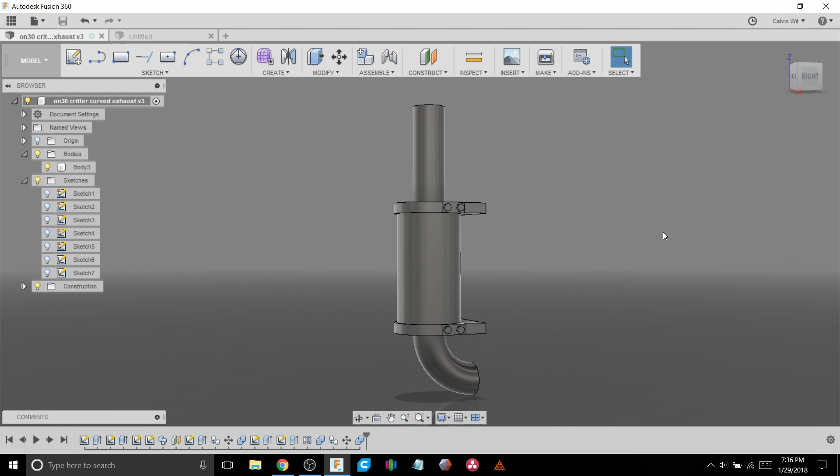So what we're going to first start off doing is designing this ON30 scale, but feel free to modify the dimensions to your needs, a little curved exhaust unit that can be used on a Bachmann Davenport. You'll also notice that I've done some detailing here with the strap and the hex nuts. You don't have to go that far if you don't want to, but I decided we might as well for those who want to. So let's just focus on designing up just the basic curved shape of the little exhaust pipe right here, the muffler body, and then the exhaust stack.

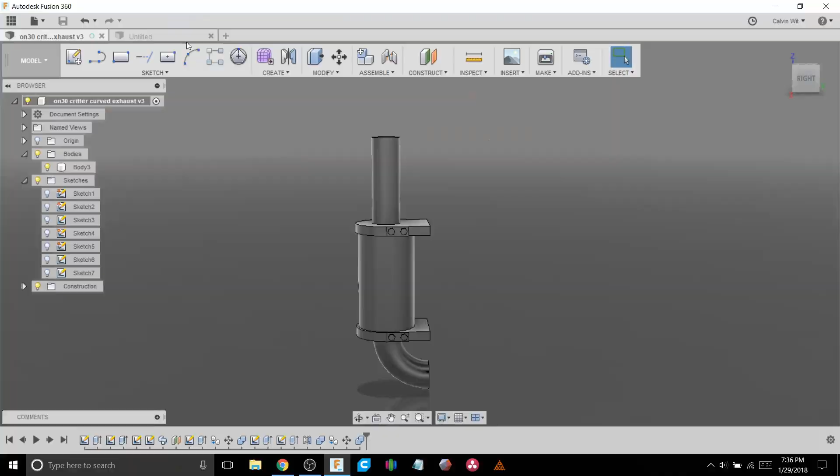So in a new window in Fusion 360, what we can do is we can start drawing the parts up. So right now you'll see there's nothing on the screen.

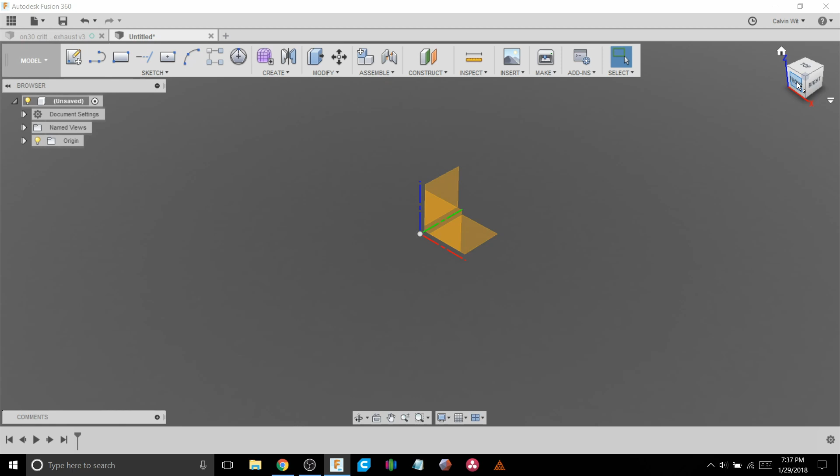I'm going to come over to the left here and click on the light bulb where it says origin, and you'll notice that this pops up. This is also oriented with this, which is what's called the view cube. So for this, we're going to want to click on the side of the view cube that says front.

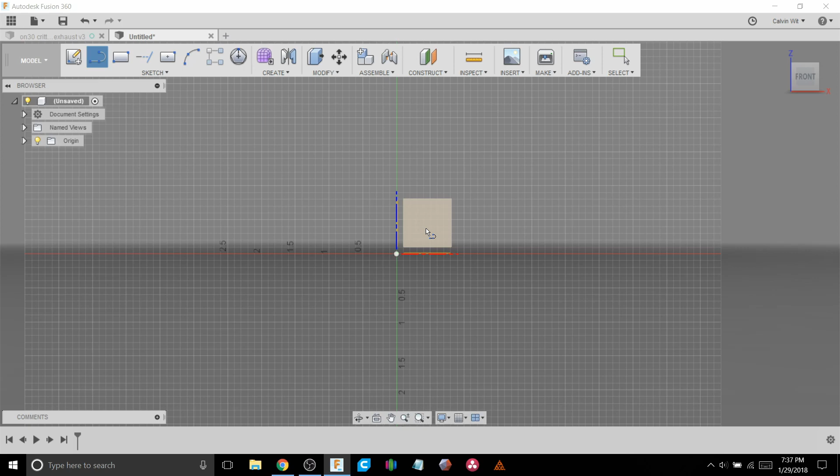We're going to want to select line. You can either go to the sketch tab here and click line, or you'll notice there's a hotkey L. Either works just fine. Click on that, and then we're going to want to select the plane that is facing us, the blue vertical, red horizontal, which will then give us the front plane, and we can get started. So we're going to select that.

You'll notice that we can really start anywhere, but for this we're going to need to start on the origin. So when you drag your cursor over it, you'll notice a green box and it will lock there. That's what you want. So just click once with the left mouse button and pull it over.

In this case, I'm going to go 0.125 inches because we're going to be drawing half the diameter of the exhaust unit, and I figured 1/4 of an inch works out to a nice size. So for all the dimensions on this, you're going to want to do it half of the actual size. For the radius, the height stays the same. So then once you've typed in 0.125, click again, and you now have your horizontal line.

Now you'll notice you're still attached in with a line. That's what we want. So now we're going to rotate it up so we get that little green box. And on the right, it should say 90 degrees as well. If it doesn't, and it's out here and you can't get that, just press the tab key once and you'll notice the degree side light up, and you can push in 0 and it'll take you to 0 degrees, or you can do 90 and it'll take you there.

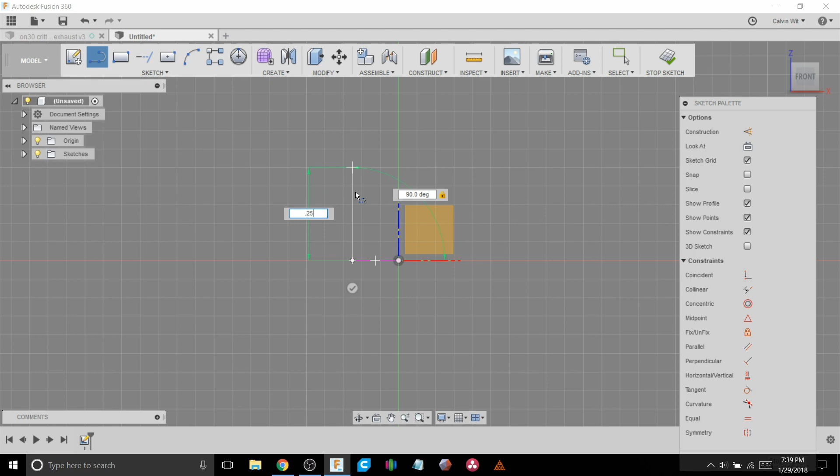In this case, we're going to want to go negative, going to want to go 270, there we go, as it's doing the 90s relative to where it was. So just remember to break up a circle into fourths, or you can just rotate around till you get there. So for the height, I'm going to go 0.375. If you don't like anything, you can just double click on the dimension and you're good. To get out of the line command, just tap the escape key and it will take you out.

Using the L again, I'm going to activate the line. I'm going to hover over the point and turn green, and then move in 0.125 inches, making sure that we're at 0 degrees, so we're horizontal. You'll notice that takes us back to the middle, which in this case we don't want, so we're going to want to retype that as 0.0625, and we're going to go halfway in, hit enter, press L again, and come up.

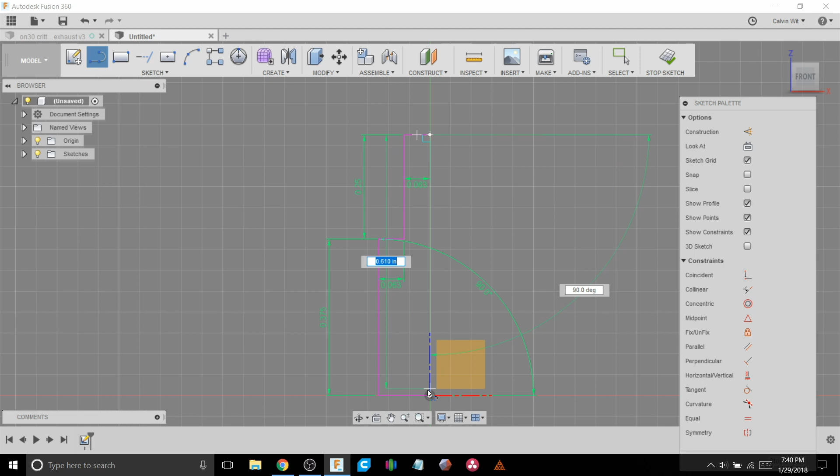In this case, I'm going to go 0.25. Like I've said, the dimensions, you do what you like best. There's no real right or wrong to this, but when you're first starting, I say start with what I'm doing. So now I'm going to click on the end of the 0.25 line, and I'm going to go in 0.0625 inches, hit enter, and then I'm just going to press L, and I'm going to click on the top of that line, drag it down to the origin, and now you'll see that the part has turned pink and is highlighted.

We'll press escape to get out of that, and in effect, we've pretty much created the basic shape of our muffler.

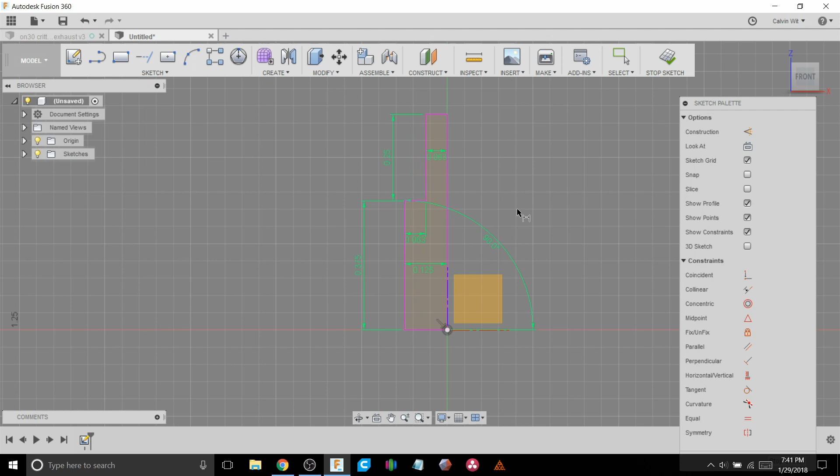One thing we need to do is press the D key for dimension. You'll notice this little line comes up. We're going to select this vertical line and this vertical line, then hit enter.

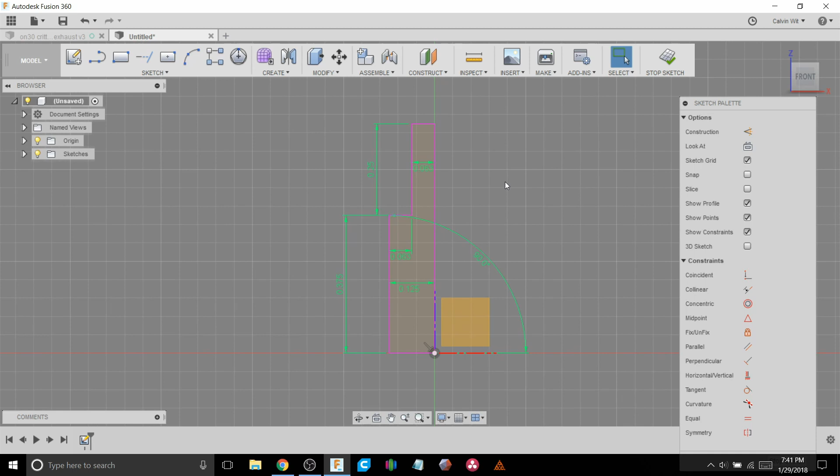That way, in case we need to adjust anything, we can do so. I'm liking how that's looking, so I'll come up to the right hand corner and click Stop Sketch. Don't worry, if you need to go back and adjust anything, just come down to the timeline, right click on the drawing and press Edit Sketch, scroll in with your middle mouse wheel, and you're good to go. So I'm just going to stop the sketch and zoom in so we can see what we're doing.

Then I'm going to go to the Create tab, and we're going to do what's called a revolve. As you can see from the drawing, this allows you to take a profile and spin it around an axis.

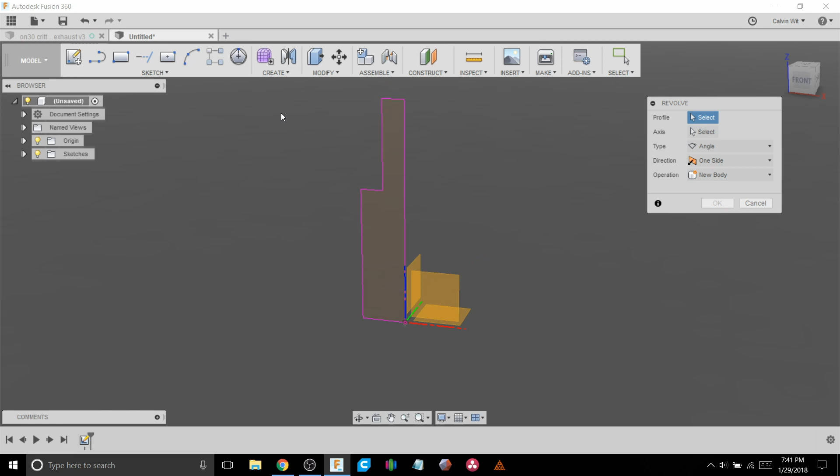So we're going to press revolve. The profile we're just going to click inside of our shape here. Then the axis, we can either select the vertical one that's here. Ideally you'd want the blue one, but we can't access that, so we're just going to click this large vertical edge next to the origin.

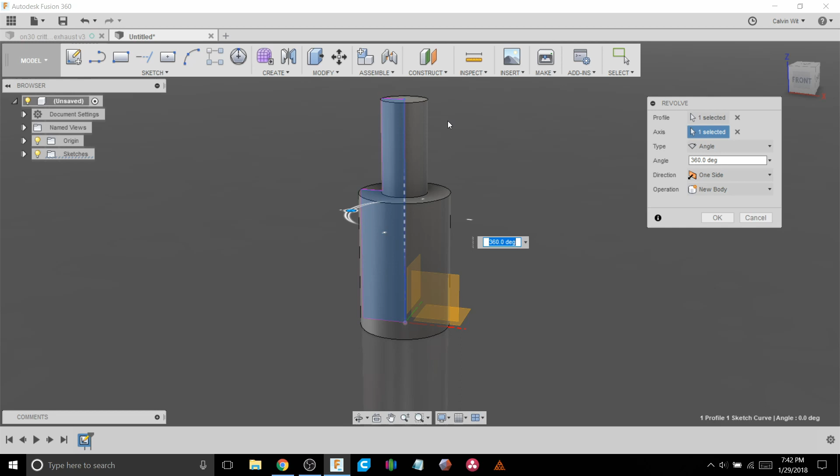Click that and you'll see it spun the shape around. If we wanted to, we could break it up into 90 degrees, or go 180. You can do a lot of stuff with this, but we want a full circle, so we're going to go 360 and hit OK.

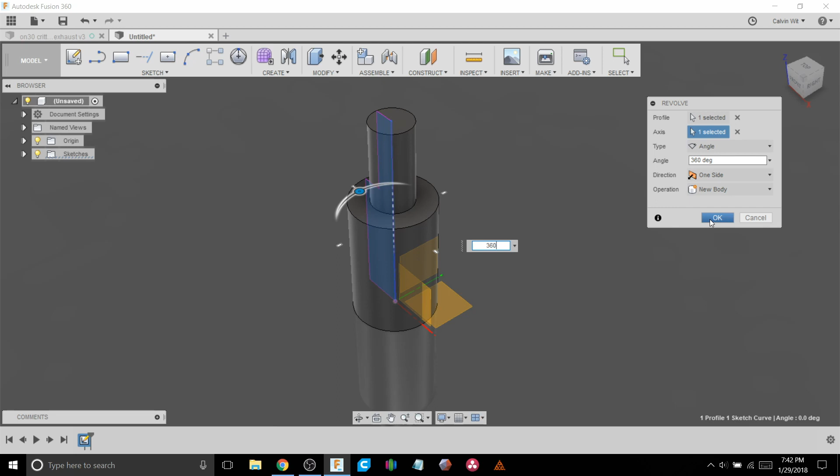Just ignore the one side and new body option, that doesn't matter at this point. Click OK, and effectively we've created the basic shape of our exhaust unit.

So if you come back here, you can see this one's a little bit longer. I decided to make this one a little bit stubbier. I'm pretty much making up the dimensions as I go, and that's perfectly fine because we can always adjust it. So now we need to make this curved unit right here on the exhaust.

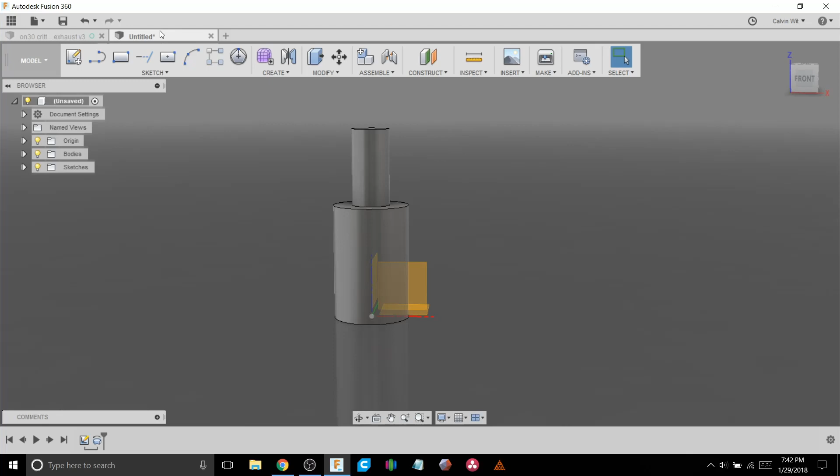So we can come into the drawing and press the L button. We're going to want to select the same plane that we used before, the blue vertical, red horizontal. This is where things are going to get a little bit interesting, so I'm going to go a little bit slower for your guys' sake.

I'm going to click on the origin right there, drag over 0.1875, hit enter, hit L again, click on the end, come down 0.1875, hit enter.

But now we're going to do something a little bit different. You can see how these lines are purple. We don't want that. So holding down the Shift key, I'm going to click on the first line and the second line, and you'll notice how they went blue.

Then while they're still highlighted, with my finger off Shift now, I'm going to press the X key and click away, and you'll see that they've now turned into orange dotted lines. These are what are called construction lines. Fusion 360 will view these as lines that are usable, but they're not going to show up if you go to do any profile work or anything like that. It will not select them as an active line to use, which is what we want.

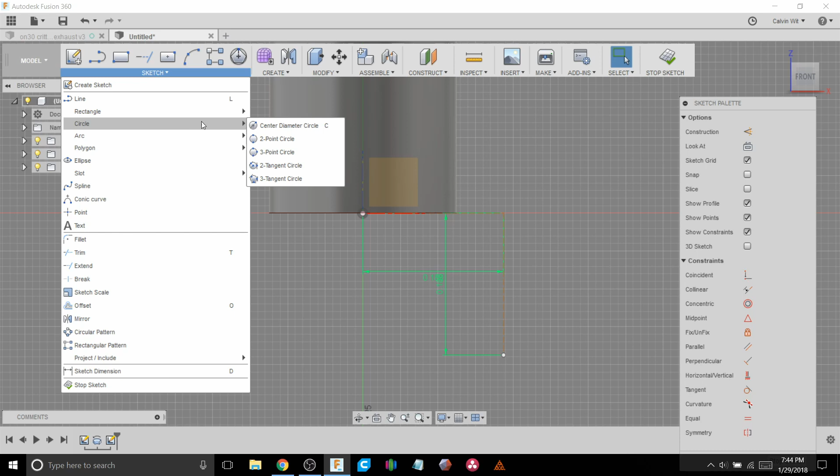So now we can go to the Sketch tab and go to Circle, and we want center diameter, or you could just press the C key. Either way is fine. Then at the intersection of our two lines, we're going to click right there and drag to either point. Because they're equidistant, it does not matter.

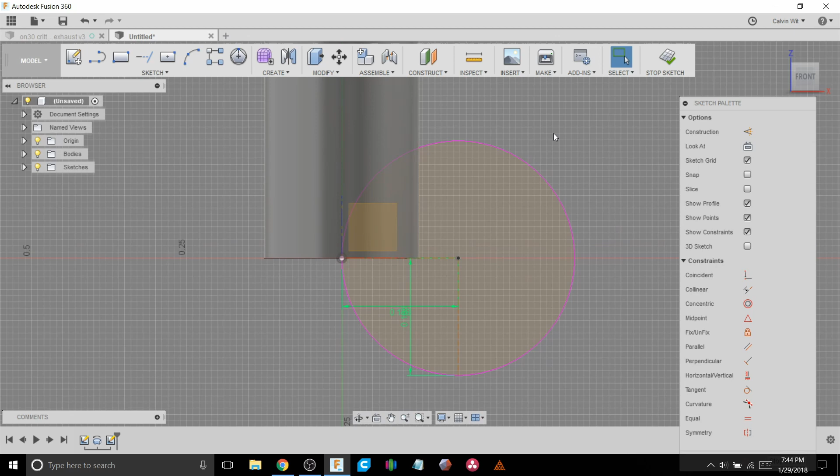You'll notice the green box at the end, that means we've got the snapping point right there. We can click, then press Escape to get out of circle mode. We've created a circle, but we don't need the circle this big. So we can go back to the Sketch tab and go down to the Trim function, or you can press the T key.

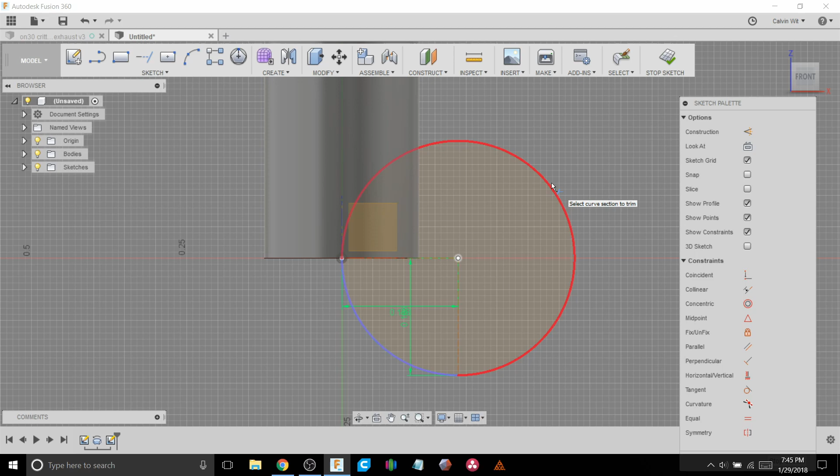You're going to want to click anywhere out here on the circle. If you're not sure, hover your cursor over it, and what's in red gets cut, what's in blue stays. So we can trim the outside of the circle and ignore the warning that pops up. It just means that original stuff that was there got deleted. It's no big deal for this application. You'll notice that we now have this nice little segment right here, which we want.

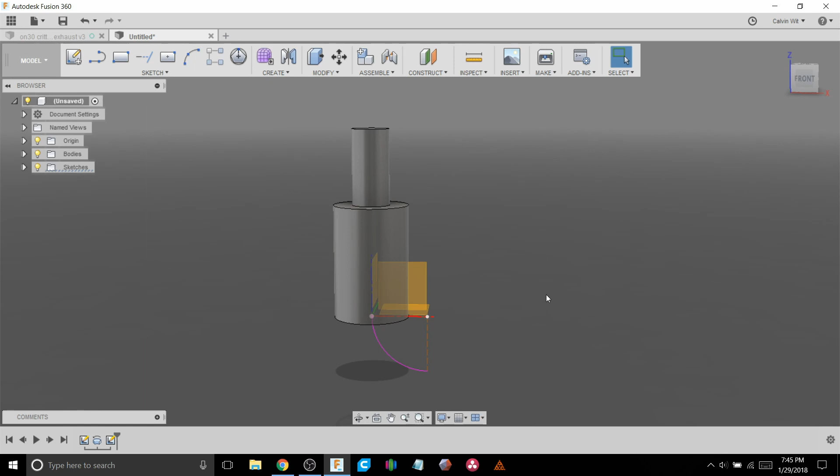So we can press Stop Sketch, and then holding down the Shift key and clicking down on our middle mouse wheel, we can move around the part. So we're going to come into a view like this, scroll in with the middle mouse wheel.

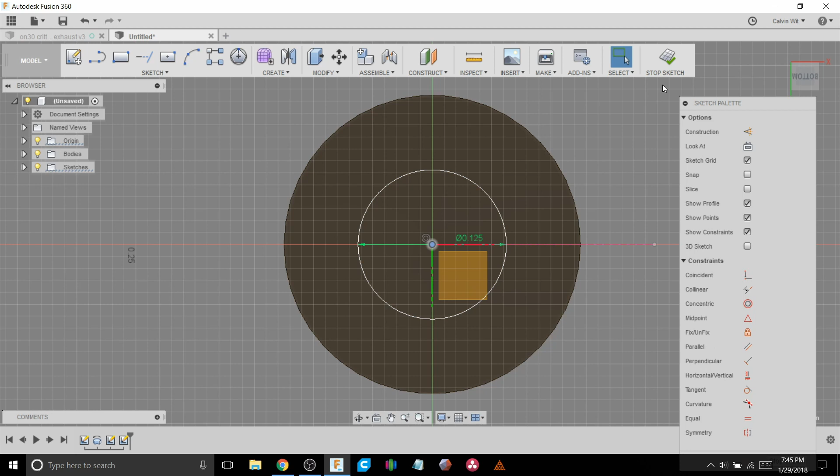Now pressing the C key for circle, we can select the bottom face of our cylinder right here. Zoom on in, and I'm going to want to do a 0.125 diameter circle as well. Hit enter, stop sketch, and now you'll understand why in just a second why we wanted to trim the circle to where it's at.

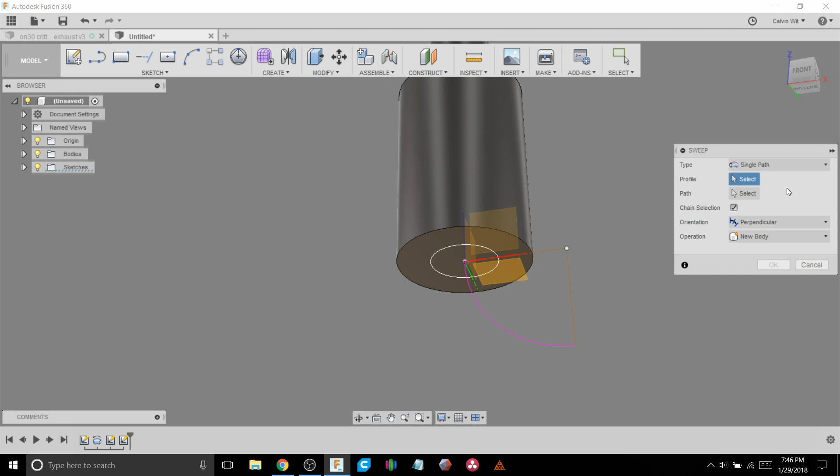So going over to the Create tab, this time we're going to use the Sweep function. Now this allows you to take a shape and move it along a path. We're going to select Sweep, and all we need to do is go Profile, which is the inside of the circle, the Path, which is the purple part, and ignore the distance, taper angle, twist angle, perpendicular. Do make sure though that the operation does not say New Body. We want it to say Join. Hit OK, and bingo. We have just created our curved segment.

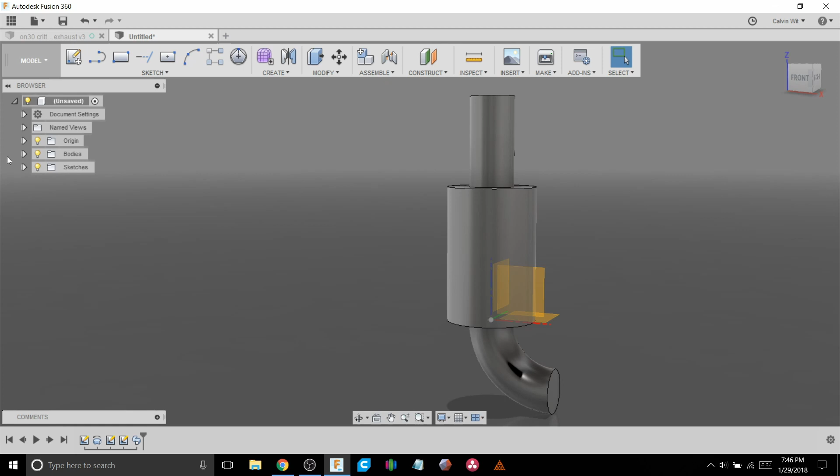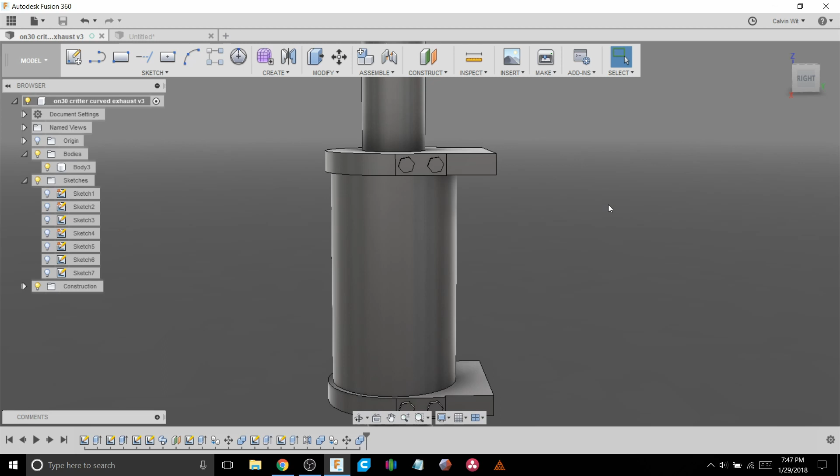So we can click off the origin at this point as we don't really need it. It's actually becoming a little bit annoying. And now we can focus on creating the detail mounting tabs here. I will save doing the detail brackets until later, but just to show you guys how to design the basic parts for now.

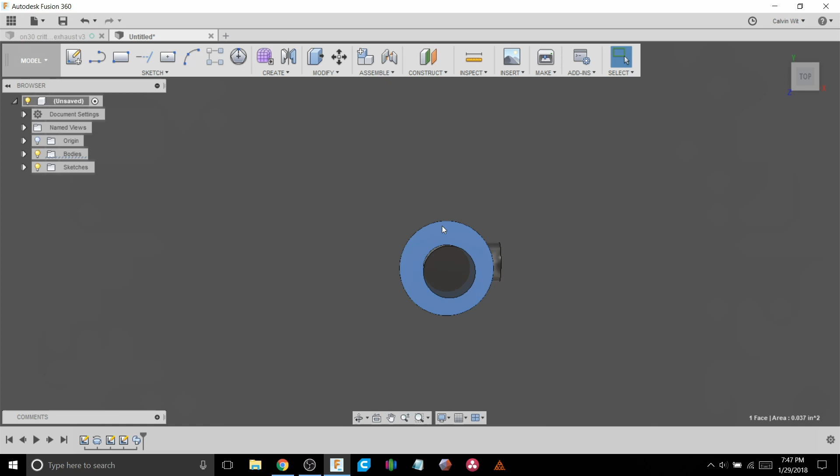So now what we're going to want to do is move to the top view on the view cube, and you'll notice that we have this circle and we have that circle. We're going to want to work off of this plane starting out, so make sure that this is the one that you select. So press L for line, ignore the origin that pops up, and click on the top of the larger circle, like so. And now we are in the top plane.

Now we need to create a rectangular shape that runs from here to there. There's a couple ways to do it, and I found the easiest one that works is to just click on the center, drag your cursor over to the edge, and don't worry if it's not perfectly 90 degrees. It's a little bit tricky to do, so just tab over to the degrees side and type in 90, hit enter.

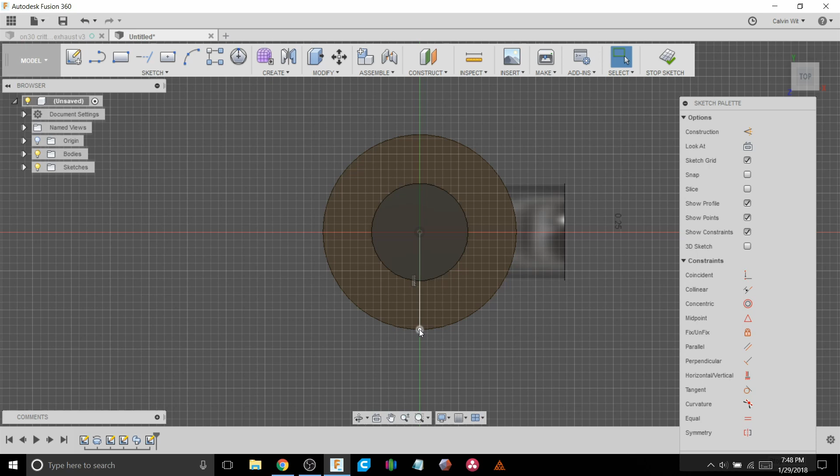Then press the L key again, come over to here and repeat the process. 90, enter. Perfect. Now we can go L, we can drag a line out. Now we're actually going to want to rotate the line so we can pick up the edge of this, and we can drag out. Alternatively, if we know the distance, we can go 0.1875 in this case and press enter. Do the same on the bottom, go out 0.1875, hit enter.

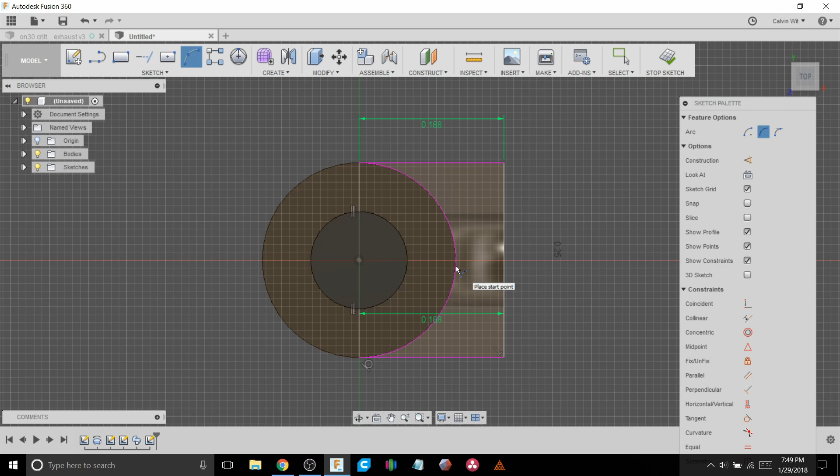Then we're going to press L again. We're going to start here and we're going to join to there. Now, one thing you will notice is obviously there's this shape and there's this line here. We're not going to keep those lines. We're just going to come along and use the arc function. Go to arc, 3-point arc, point, point, and then we're just going to drag it out until it snaps to the existing circle. Click there, hit escape, and then we can shift select those two lines and we can just delete them. We don't need them anymore.

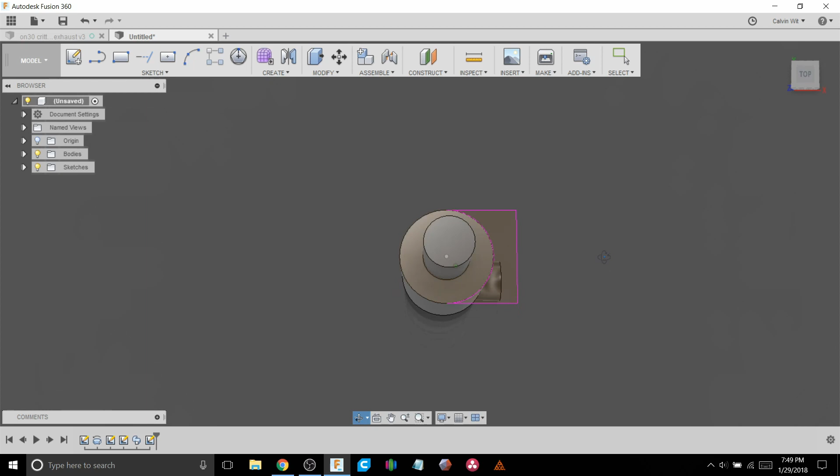That works perfectly fine. Now that we have the basic shape done, we can now take and drag this shape, which is also called extruding. So I'm going to go to stop sketch, pan around, and go into the create tab—my bad—and we're going to use extrude. You can also press the E hotkey if you want.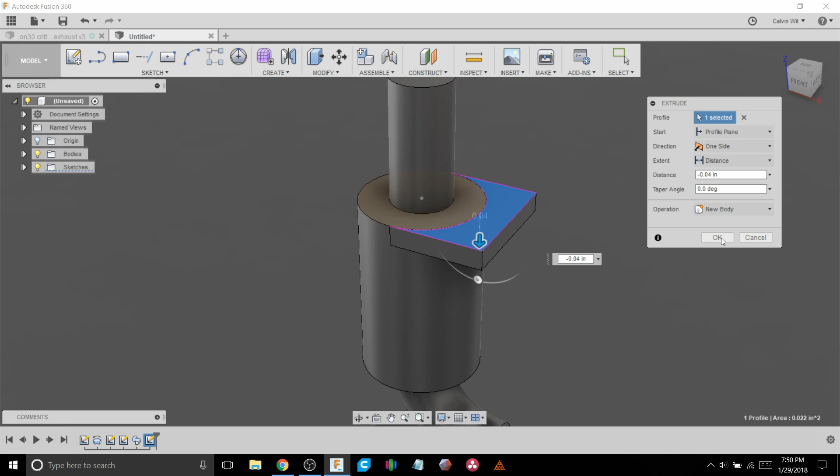So we're going to select extrude and just extrude this shape. In my case I want to go down, so I'm going to go minus 0.04. Now one thing we do want to do here is go into the operation tab and make it a new body. So what that means is this isn't attached to this, and you'll see why in a minute. Doing that actually makes life a little bit easier in my opinion. I'm going to press OK, and we now have this new component.

If you want to double check, go over to the bodies tab here, click the arrow so it drops down, and you can highlight the different bodies that are there. You can turn them on and off, useful things like that.

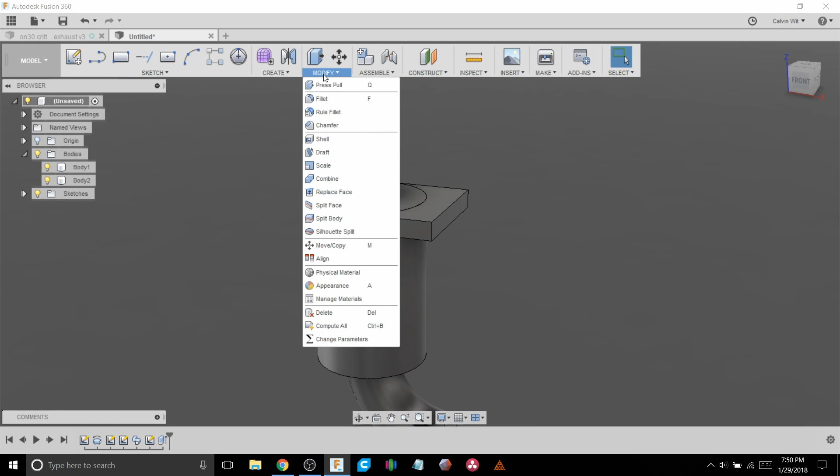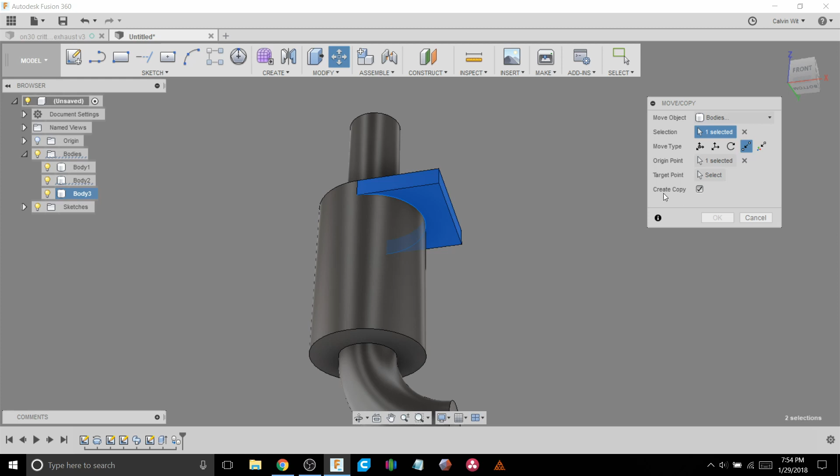Now we can go to the Modify tab and move down to Move Copy, or you can use the M key. Select this body, and we're going to want to use the point-to-point function. Our origin point, we're just going to use that curve there, and our target point, we're going to use that there. Before we go any further, you're going to want to click the Create Copy button. That is critical. Reselect target point, select right there, and you'll notice it's now copied this shape down to there. Hit OK, and now you've very quickly copied your parts down.

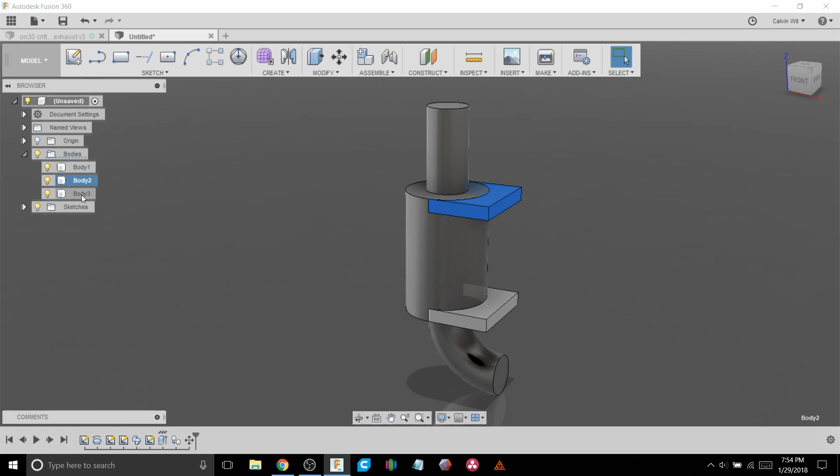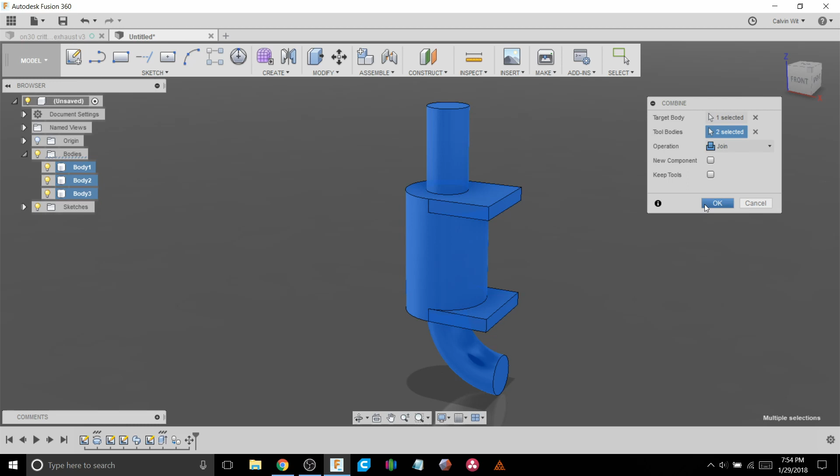Now if you try to export this file as is, Fusion 360 will view it as this body, that body, and that body, and it will not export all three at once, which is what you want. So you're going to want to go back to the Modify tab, move down to the Combine function, and the order that you select things does not matter. I'm just going to select the main body first as our target body, then our tool bodies are the separate parts, which would be the two tabs, and we're going to hit OK. Now Fusion 360 sees it as one whole object, which is what we want.

Also, I'm going to save this because I'm really stupid and I did not do that.

My phone keeps going off like crazy.

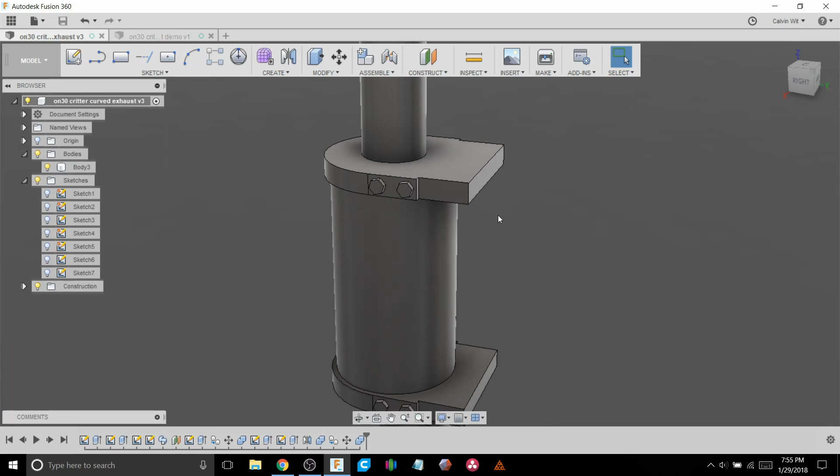Okay, so that's how you get the basic shape done. Now for those who really want to take things up a notch with their model, I'm going to show you guys how to add the detail strip with the rivets on the side. Again, everybody's going to want different dimensions, so I'd ideally follow along for the first time, and then feel free to do whatever you want for everything else after.

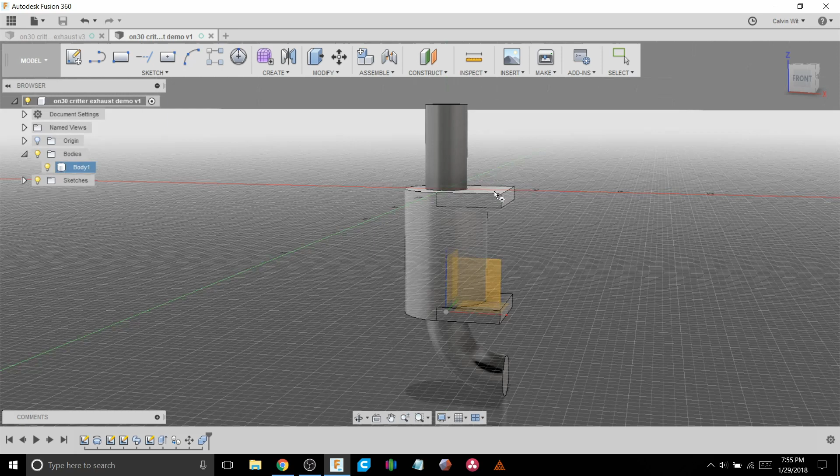The first thing we want to do is press the C key for circle, and it doesn't matter if we select the top or the bottom. I'd recommend the top though, as you won't have the angled pipe potentially in your way. So we're going to select the top plane and make a circle from our origin out to the edge.

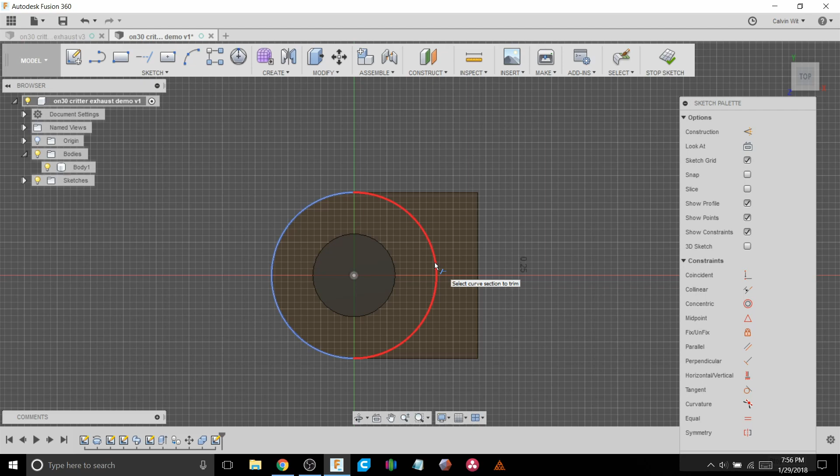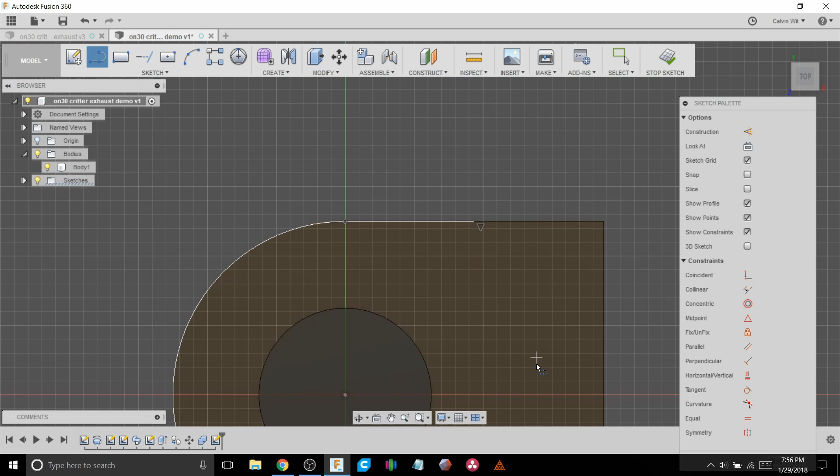We're going to press T to trim, and get rid of this half right here, we don't need that. So we select that, then hold down the middle mouse wheel to move along. We're going to press L for line, click there, and move over to the halfway point right here. You'll know you've hit halfway when it pauses and you see that little green triangle. Click there, and do the same for the other side, like that.

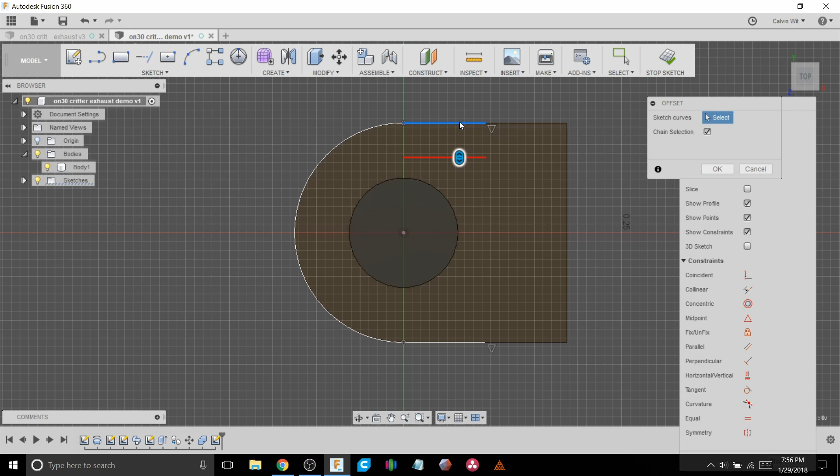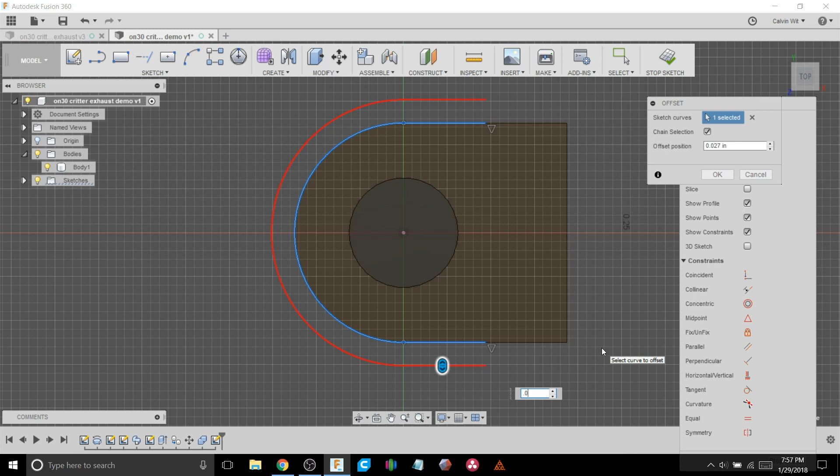Now we could draw everything and go from there, but we're going to use the offset command to make our life easier. Press the O key, and make sure chain selection is turned on so it views everything as one item. Not sure why it didn't here, but just click as needed. Now we don't want to offset towards the inside, we want to do it towards the outside, so you can use the slider to move it in the right direction to figure out which units you need. I'm going to make this bracket 0.02 inches, which is just about 0.5 millimeter thick.

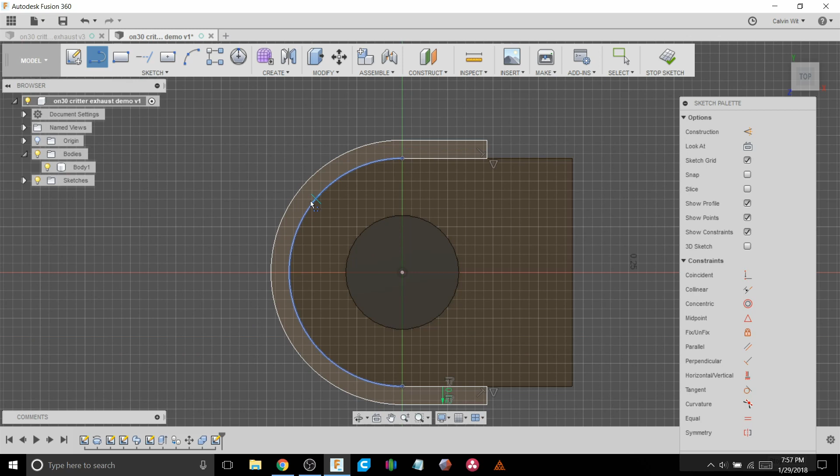It's going to print, it's going to be visible, but it's not going to be overly thick. So with that done, we're going to press the L key for the line, click here and click there, and click here and click there, and you'll notice that we have that highlighted shape again, which is what we want.

So now we can stop sketch and zoom in, and we can press the E key to extrude. We're going to select the inside of here. Now this is a handy tip if you're not sure how thick something needs to be: go to the extent function and click to object.

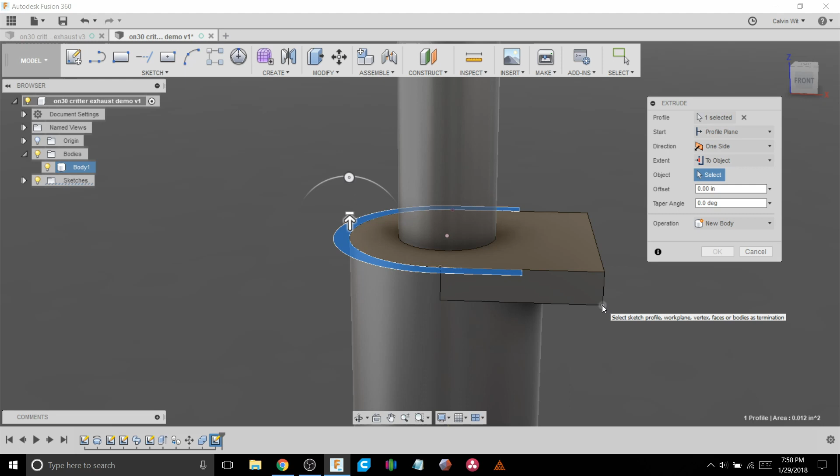Now the object that we want is this corner right here. Click that, but before you hit OK or enter, go to operation and tell it you want to make it a new body. This way we can do the copy function that we did before, and it makes your life easier. So we can hit OK.

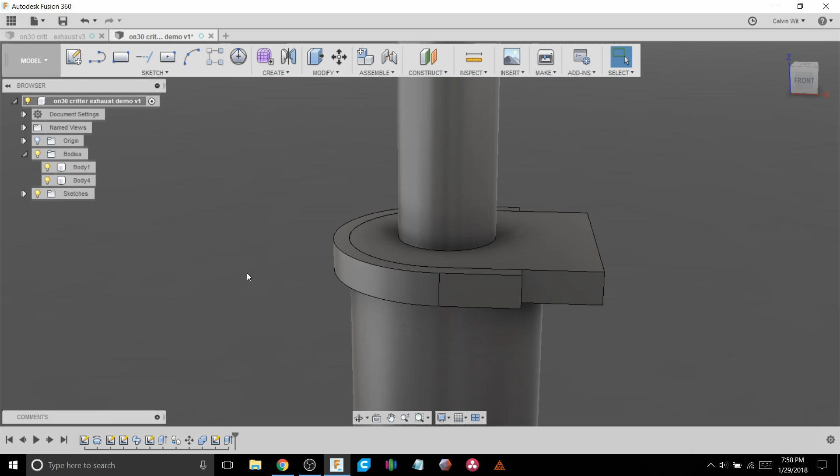And now that we have our tab there, we can come along and add the hex bolts or rivets. I will show you guys how to do both in this video. Pick whichever one you want.

So we're going to press the L key for line, and we're going to want to select this little rectangle here on the part we just made. So we're going to click on that, zoom in, go from the center to the center, and escape out. Then we're going to highlight that line, and we're going to hit X to make it a construction line, so we can use this as a halfway reference, but it will not get in the way.

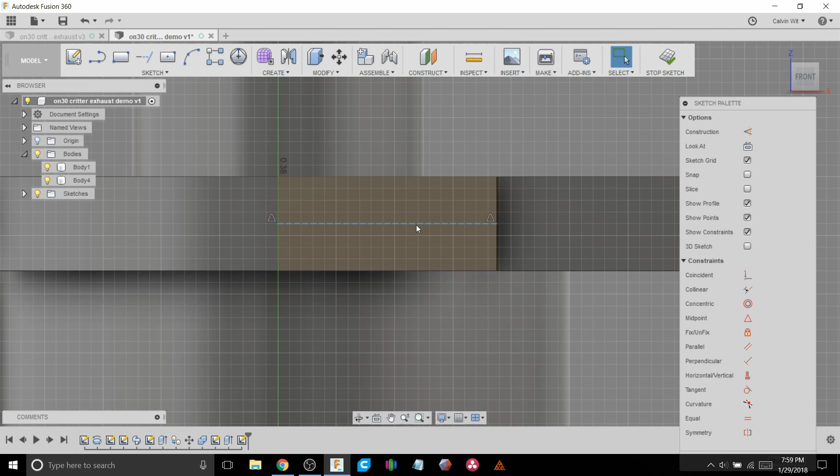So the first and easiest to make is a rivet. So just press the C key for a circle and just choose an arbitrary distance from the edge. We're going to define that in a minute. So I'm just going to click there. I'm going to make it 0.02. Hit enter, hit enter.

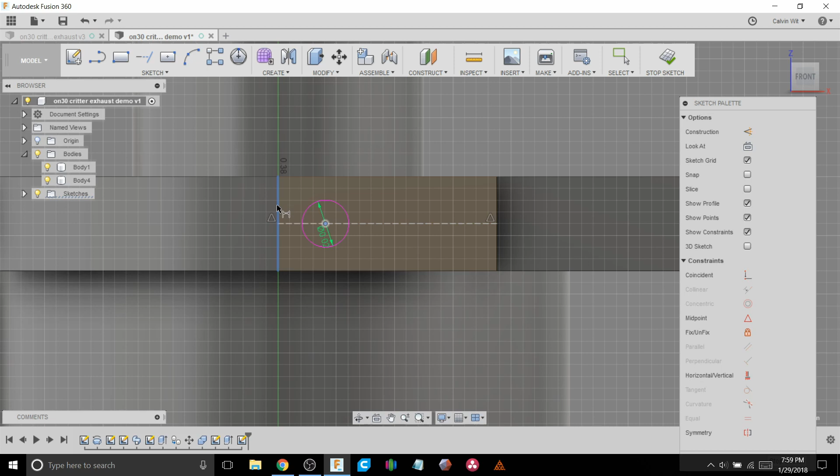Then while we're still active in the sketch plane, I'm going to press D for dimension. Click here and then click to this edge right here. And I'm going to want to go 0.025 inches in. I'm eyeballing it. If I don't like it, I can just double click it and I can go 0.02. I like that better. I'm going to stick with that.

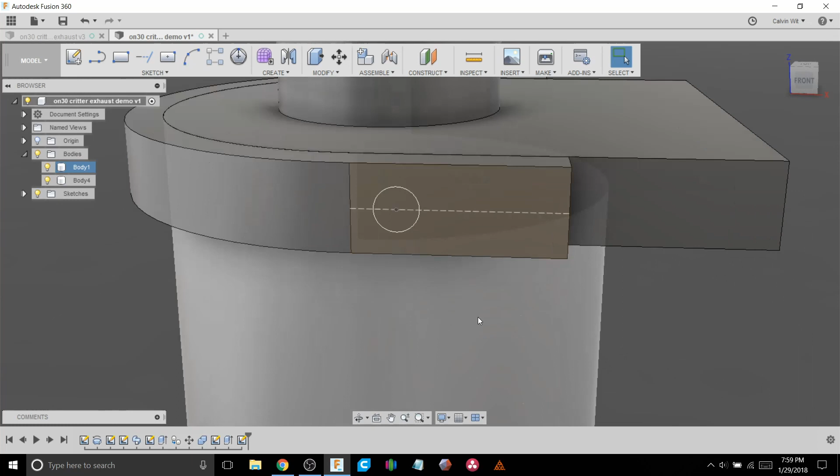So I'm going to click stop sketch, E to extrude, select this. Then I'm going to want to go out 0.01 inches, but I don't want to join it, I want to make a new body. Hit OK. Then I'm going to press the F key to fillet it.

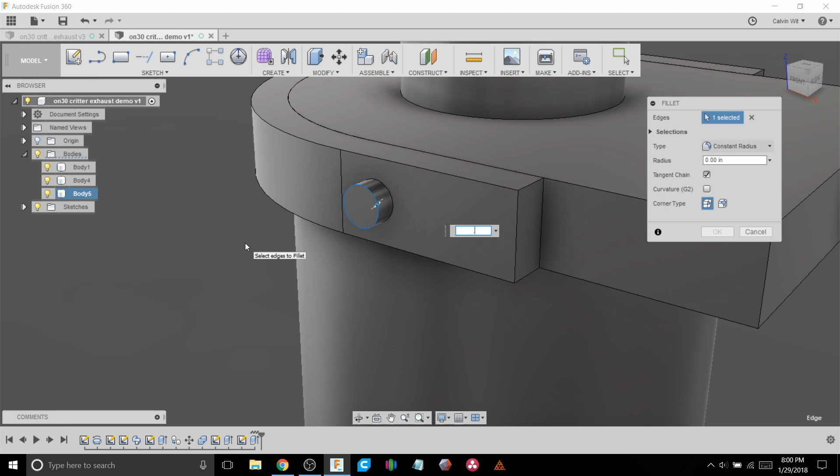I'm going to select the outer edge right here, and I'm going to tell it I want a 0.01 radius fillet. You'll see that it's rounded it over. I'm going to press OK. And that's how you can create a fillet that makes a rivet very easily.

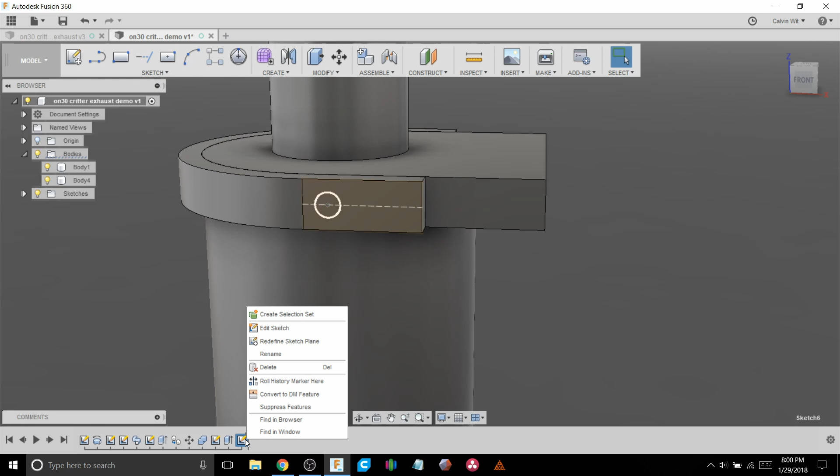Now we're going to go back, and I personally prefer bolts on mine, so I'm just going to click fillet and delete. You don't have to do that. I'm just going to delete those two functions, but I'm going to keep the original sketch to save myself a little bit of time. I'm going to delete the circle because I don't want that.

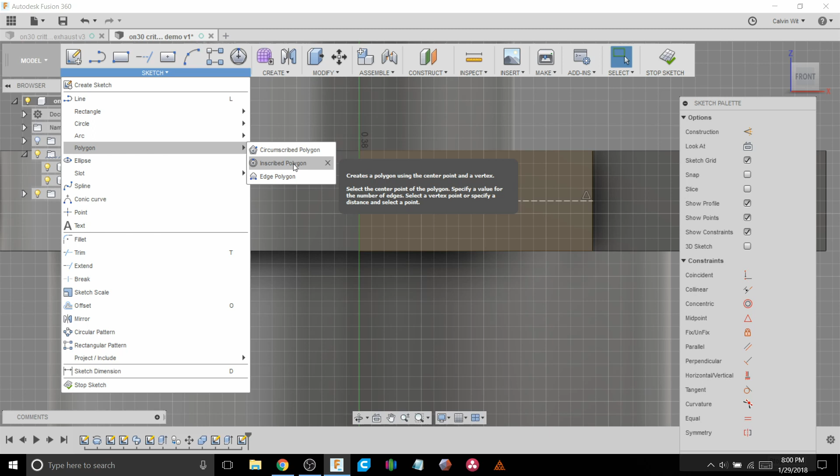I'm going to go into sketch, go to polygon, and I like to use an inscribed polygon. You can use a circumscribed, it depends upon what you're trying to do, but in this application, inscribed works better. So I'm just going to click that, click on the line again, and I'm going to go out 0.015.

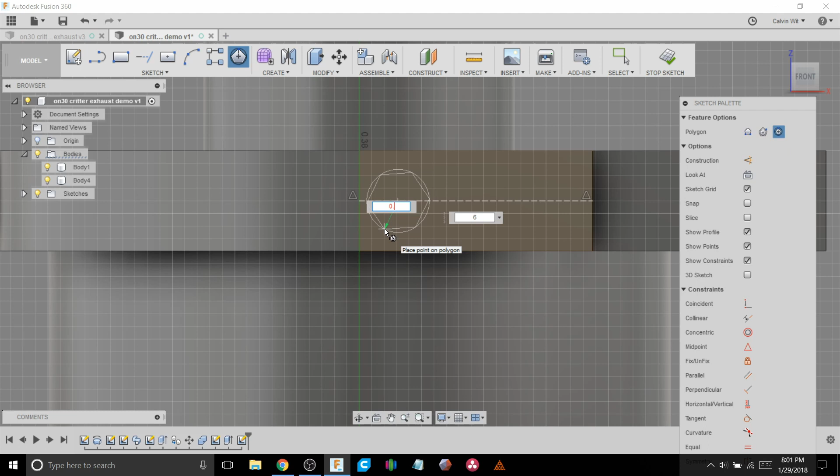Now, here's a fun thing that you can do, and I highly recommend doing this, especially if you're doing a large scale model: vary the angle of the bolts. In this case, I'm going to make one like that. You go to 0.015, hit enter. Then I'm going to press the D key for dimension, click here, click on the edge, and go 0.02, hit enter. Do the same on the other side.

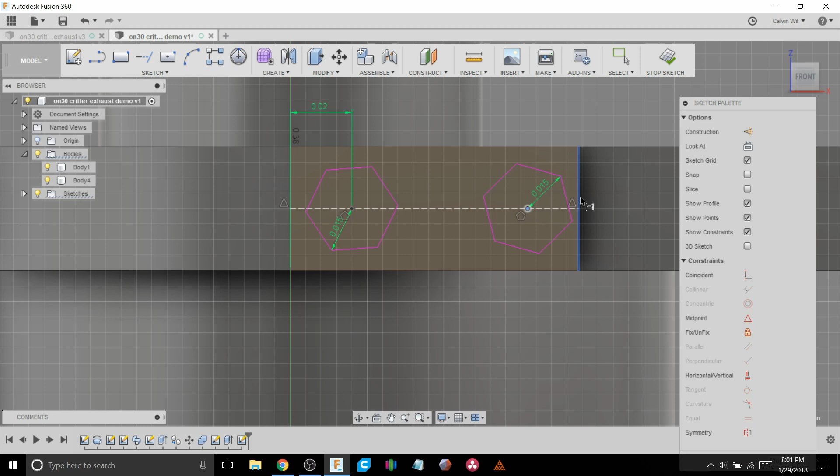I've created my two bolts, and you'll notice they are at different angles. You don't have to do that, but if you're going to take the time to design in the detail bracket, it's not a bad idea to add little features like that, especially for a larger scale model where you'll see that stuff.

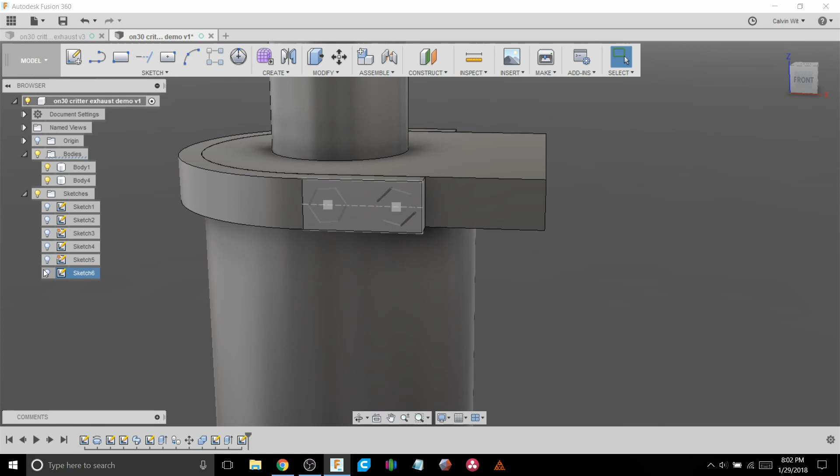We can press Stop Sketch, and you'll notice we can't see the sketch right now, but if we go to the sketches tab, click the arrow and hover over the last one, the polygons come up, and we can click the light bulb to turn that on. Press E to extrude, drag this guy and that guy out 0.01, and as before, make it a new body. Hit OK, then turn that off since we don't need it.

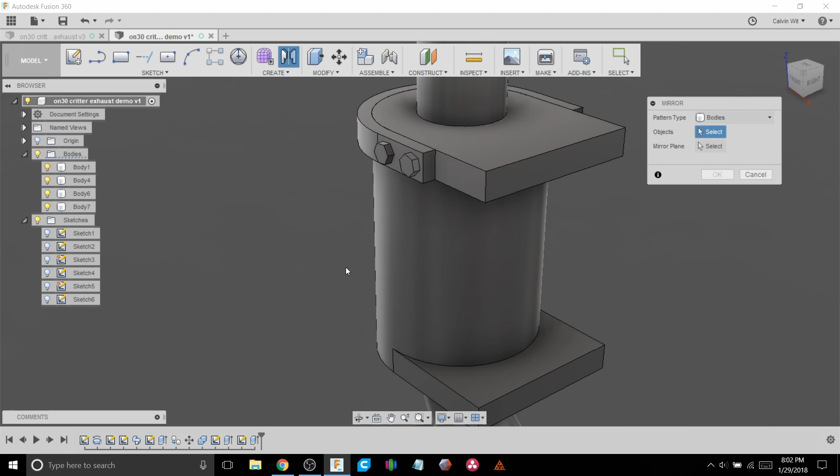Now I'm going to go to the Create tab and use the mirror function. This is really helpful in applications like this because I can select my two bolt heads, turn on my origin by clicking the light bulb, then for the mirror plane use the blue vertical, red horizontal. If you're not sure, you can click on it, and if it's not right, just delete it there. You'll notice a ghost of the hex bolts right there, which is what we want. Press OK.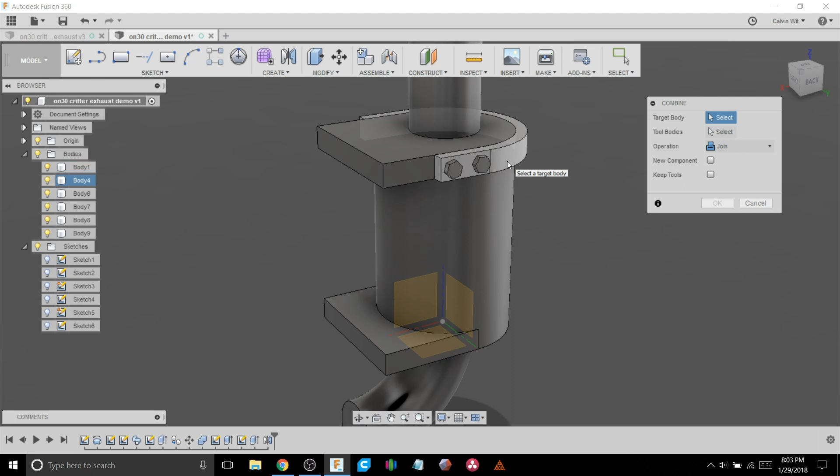Go to the Create tab, the Modify tab, Combine. We want to combine the strip here and our 4 newly made bolts. Hit OK. Now this is all one component, and this is all one component.

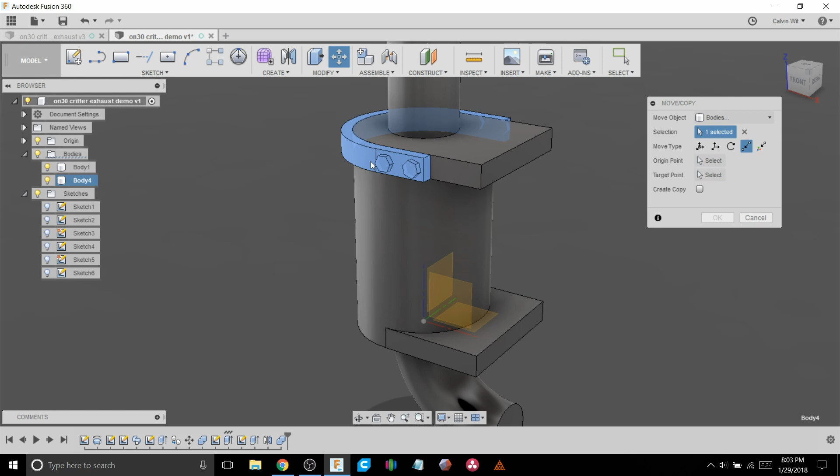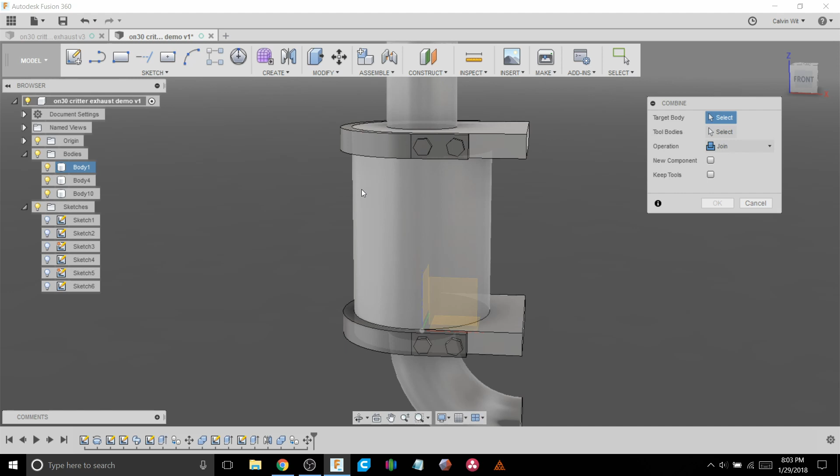Like we did with these, we can just do a move copy. So I press M, select this body here, select this outer edge of the part as my zero. Don't forget to click Create Copy, click down there - that looks good. Hit OK. Then we can go back to the Modify tab, do a combine this guy and that guy. Hit OK. We can turn off origin since we don't need it, and close sketches since we don't need it.

And that is how you make an ON30, or really any scale, little exhaust unit.

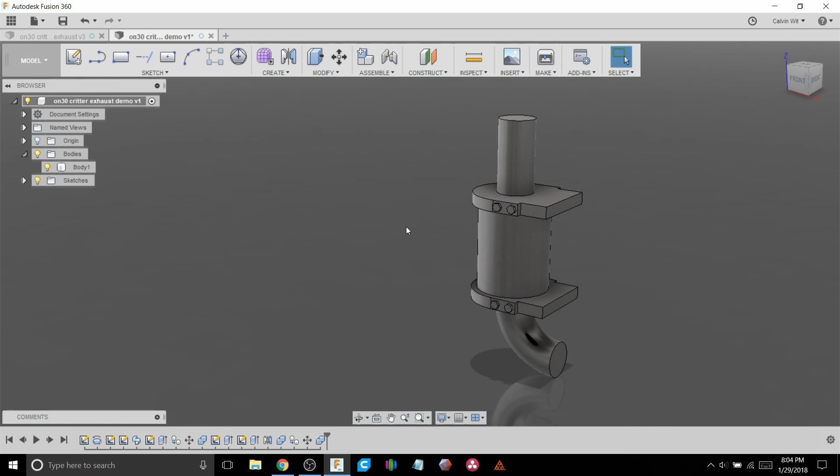To give you an idea of actual design time, this one took me no more than 6 minutes to pull off. I only say that to make you realize that once you know what you're doing, little detail parts like this aren't that hard. When doing a demonstration you have to go much slower, so don't feel flustered if it feels like it took you half an hour to get to this point. That's normal - you're learning. Once you know these tricks, it's like, okay, I just do this, I do that, and it makes more sense.

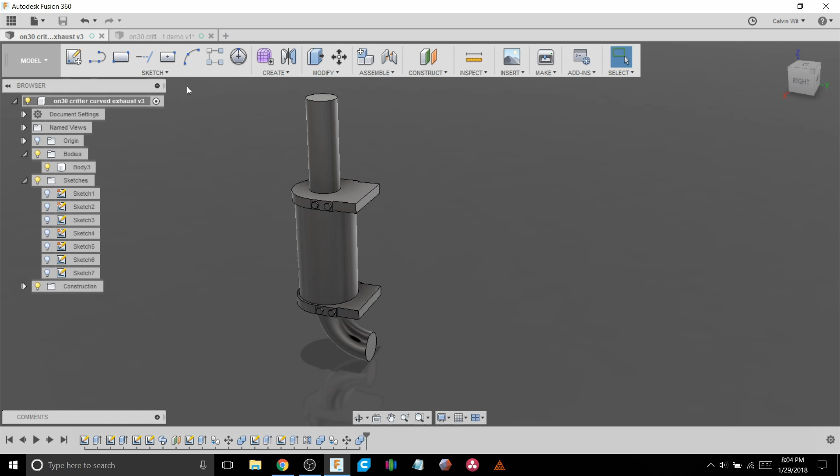For the final bit, I'm going to show you how to export the file so you can take it and send it off to either your 3D printer, a friend's 3D printer, or an online 3D printing service, whatever it may be.

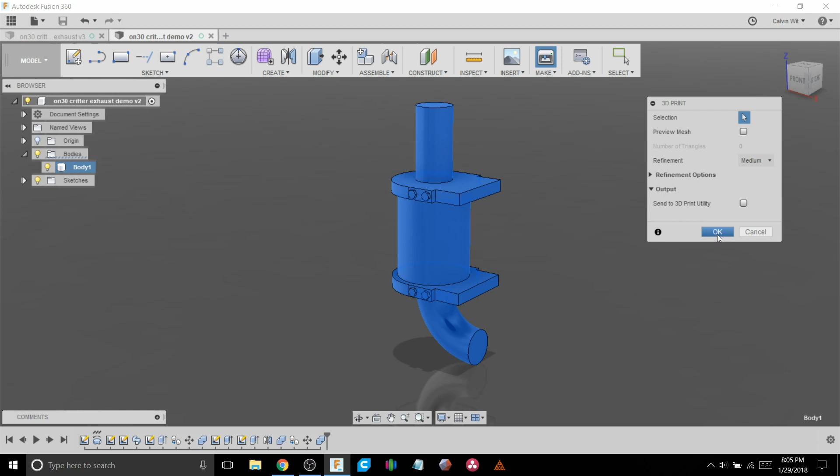I'm just going to save again for good measure. Hit OK. Then go to the File tab and scroll down to 3D Print. Click on that, and we want Body 1, which is this guy. For a model like this, medium refinement is fine. For output we don't want that, so we'll unclick and press OK. It'll ask where we want to save it - I'm saving to my desktop as ON30 Critter Exhaust Demo. Hit save, and we've exported the file.

Do note this one has been modeled in inches as its native units, so when you take it to a 3D printing service, you'll want to select inches as the units. If you designed it in millimeters, you're fine. I'm not fully sure why millimeters is the standard for 3D prints, but just so you don't load it in and the software instantly rejects it saying the model is too tiny - sorry, no can do.